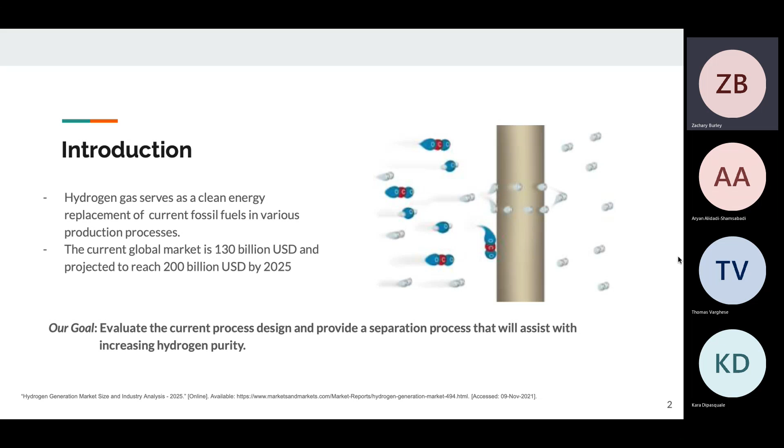We have been provided the task of evaluating the current initial design and simulation for this conversion process and providing a separation process that will assist in enriching the hydrogen gas production purity within the given restrictions provided.

To begin, Alpha Corp Industries is a company that focuses mainly on extracting value from natural resources such as minerals and petroleum. The company is currently in its preliminary stages of designing a new $2 billion chemical plant in Texas. As displayed in the flow sheet is their design, with an overall goal of optimizing on the growing market for hydrogen gas. It can be seen that there are currently two outlet streams within the process.

One is at the bottom of the flash drum, containing 99% water being sent to wastewater treatment plants. Within the red dotted box in the upper product of the heat exchanger, it can be seen that the company has currently reached an output of 59% hydrogen gas.

However, Alpha Corp Industries has little experience in further designing a separation process to enrich the hydrogen gas to a minimum of 98% purity. This is where our team of junior engineers comes in handy. As a team, we have a valid separation solution that will be proposed to you today in detail, which will enrich this hydrogen gas. Furthermore, we have a solution that will ensure that the hydrogen gas gets pressurized so it can efficiently be transported via pipeline to nearby clients.

In general, our solution includes the addition of metallic membranes made from palladium-based alloys, and we are excited to present this to you today.

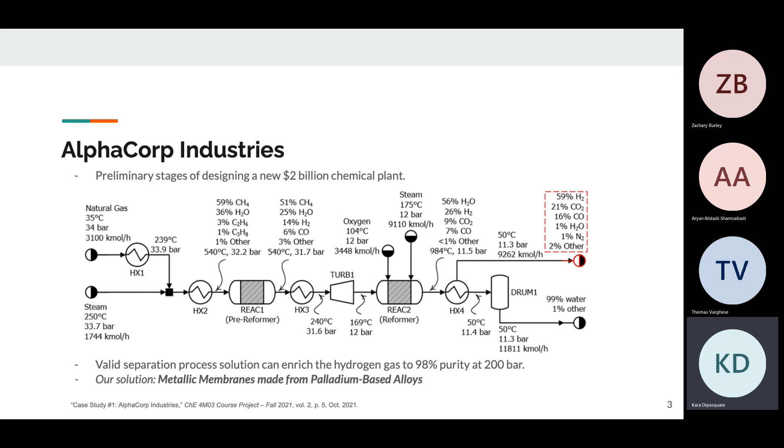Palladium is classified as a dense metallic membrane. Gas transport through the membrane occurs through a solution diffusion mechanism, where hydrogen dissociatively adsorbs and diffuses through the metal rather than moving through pores. Other than palladium, most metals require an energy input in order to overcome an activation barrier to adsorb hydrogen.

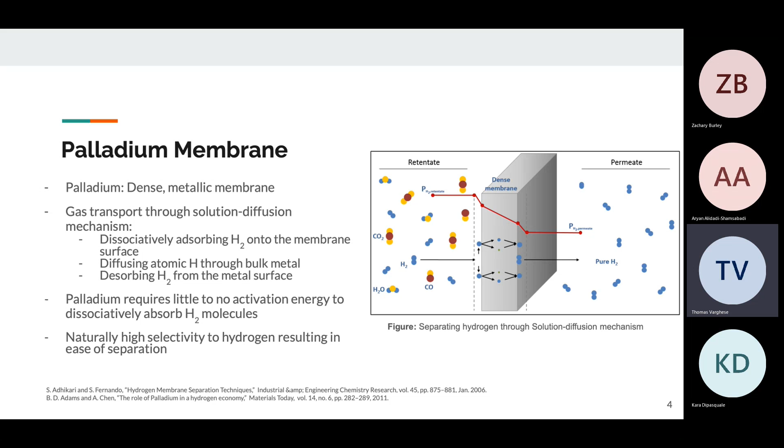This leads to higher pressures and temperatures being a necessity in the process. On palladium surfaces, the dissociative adsorption of hydrogen molecules occurs with little or no energy due to how naturally selective palladium is to hydrogen. This selectiveness also makes the separation of hydrogen much easier in the process.

Metals such as vanadium, niobium, and tantalum offer higher permeability when compared to palladium. However, when exposed to hydrogen at operating temperatures and pressures, these metals undergo a process known as hydrogen embrittlement, where they lose flexibility and become mechanically unstable. Additionally, these metals are prone to the creation of surface oxide layers, which lead to a decrease in hydrogen transport.

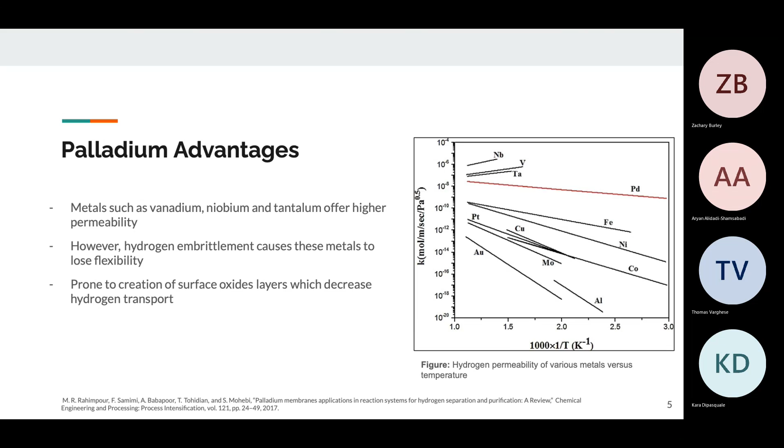Palladium is commonly alloyed with other materials for various benefits. Common materials used for alloying are silver, copper, and gold. Alloying with these metals results in increased permeability compared to pure palladium, better resistance to poisoning by different constituents in syngas like carbon monoxide and carbon dioxide, increased thermal stability at higher temperatures, and reduced cost of production, especially when using copper since it is a cheap metal.

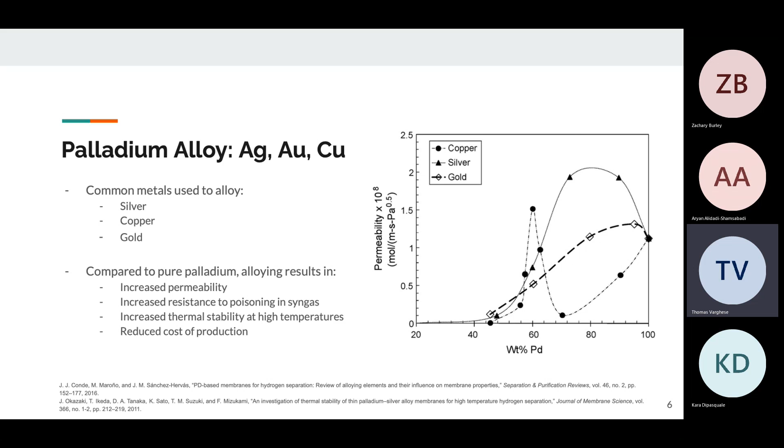As seen in the figure, the weight percentage used for alloying results in varying hydrogen permeability. To maximize permeance in palladium membranes, silver alloy weight percentage should be in the range of 10 to 30%, copper alloy weight percentage around 40%, and gold alloy weight percentage in the range of 5 to 20%.

Silver is one of the most commonly studied and utilized metals for alloying with palladium and can be found in existing commercial applications. Looking at the figure, we can see improvements in hydrogen permeability and flux with the addition of silver to the membrane. The addition of silver also increases hardness, mechanical stability, and chemical inertness.

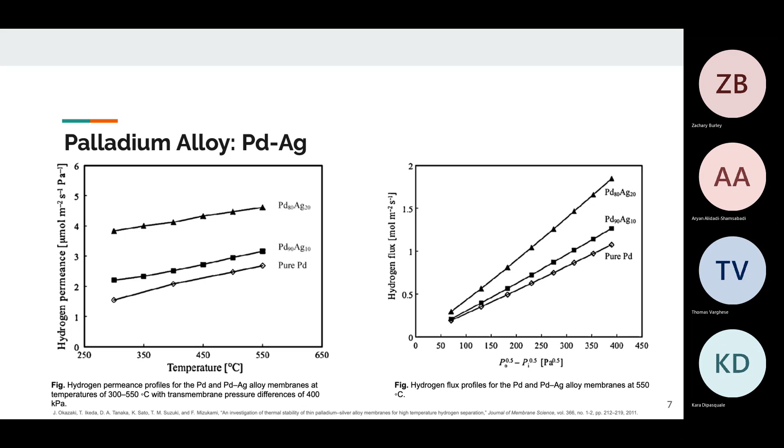The presence of additional gases in the feedstock can affect membrane performance and lifespan. These adverse gases poison palladium membranes, resulting in decreased flux and irreversible changes in some cases. Usually these gas molecules are adsorbed onto the surface and hinder the dissociation of hydrogen onto palladium, resulting in reduced mobility of hydrogen atoms located on the palladium surface.

Sulfur, carbon monoxide, and water vapor are common gases known to poison palladium membranes. Sulfur is more problematic as it leads to irreversible changes and eventual destruction of the membrane over time. In the case of Alpha Corp's feedstock, sulfur is not present and does not need to be accounted for, making the use of palladium membranes even more attractive.

Carbon monoxide and water vapor cause reversible changes on palladium, which lead to a decrease in permeability and flux. The product stream in Alpha Corp contains 16% carbon monoxide, which is a cause for concern.

However, alloying changes the surface reactivity and electronic structure of palladium and helps negate the poisoning effect of carbon monoxide. Additionally, operating at high temperature reduces it as well. Therefore, by alloying with silver and operating the process at around 550 degrees Celsius, we will mitigate the effects of carbon monoxide on the membrane.

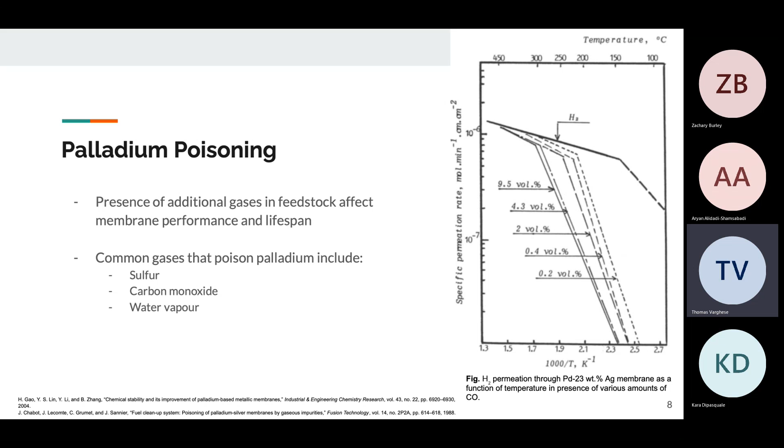Finally, water vapor only accounts for 1% of the product stream, which can be neglected once again due to alloying and the operating temperatures of our process.

It is without a doubt that palladium is the most widely used membrane material for hydrogen permeation and is infinitely selective to hydrogen while demonstrating a high recovery. For example, when compared with their counterparts such as polymer membranes, palladium-based membranes have the distinct ability to achieve hydrogen purities as high as 99% or higher.

This outcome, however, is only valid as long as process requirements and pre-treatment methods are handled appropriately. To reiterate, our goal as junior engineers is to achieve a minimum of 98% hydrogen from an initial composition of 59%. It is evident that this can be achieved in a single step with a palladium membrane, and the process must be carried out at relatively high temperatures.

It is crucial to note that palladium membranes are often damaged by hydrogen embrittlement, which could occur below the critical temperature of 293 degrees Celsius and a pressure of 20 bar. It's also important that we don't exceed temperatures around 650 degrees Celsius, as palladium may be subject to deactivation upon these extremely high temperature conditions.

With that being said, for our process we'll be making improvements to the membrane inlet conditions to ensure that the palladium membrane can result in an ultra-high recovered hydrogen stream. We will now be looking at our improvements being made to the design more in depth.

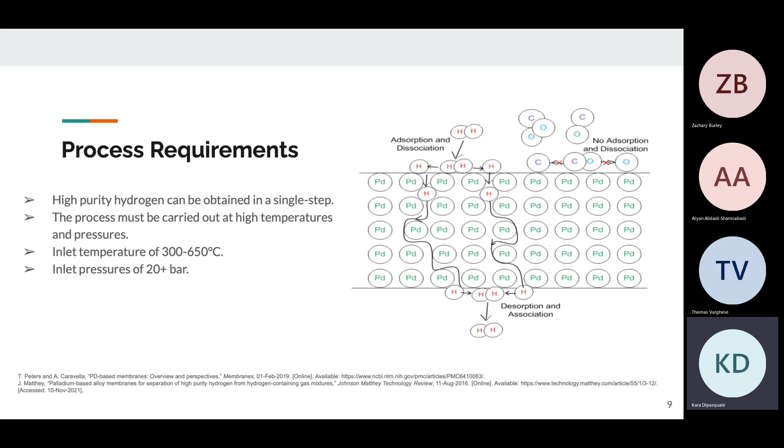As a team, we have made additional improvements to Alpha Corp's initial design. To begin, as stated earlier, we know that in order to achieve a high recovery, the membrane inlet temperature must be high, somewhere between approximately 300 and 650 degrees Celsius. We will be achieving this temperature by adding a series of heaters to the system prior to the membrane entrance.

These heaters will be placed after the heat exchanger in the process once water has been removed. We will also be adding a compressor to further increase the pressure of the mixture right before the membrane entrance. With valid high temperatures and pressures, our mixture is ready to enter the membrane. Once we achieve a permeate stream of hydrogen, we need to further compress the gas to achieve a pressure of 200 bar, allowing for the gas to be stored in pipelines.

The resulting hydrogen gas will also be cooled and stored at approximately room temperature conditions, being about 22 degrees Celsius. Our plan to improve the design will result in recovered hydrogen readily available for use.

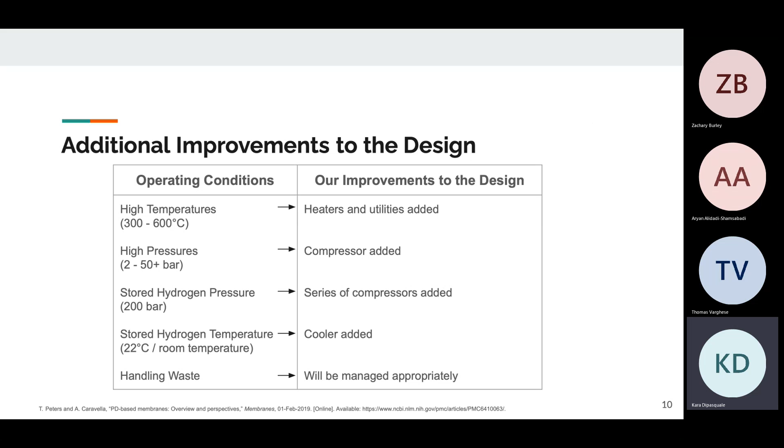However, we need to keep in mind that the membrane will also produce a stream of waste, which will be dealt with accordingly. The waste analysis will be discussed further on in our solution, but for now, let's visually take a look at our design improvements displayed in a piping and instrumentation diagram.

As displayed here, our generic P&ID shows all improvements made to the system, from inlet gases to pipeline storage and waste disposal. Within our process, you can see that we've made improvements to the upper outlet stream of the heat exchanger labeled HX4.

From here, we have added our series of heaters with a 2-bar pressure drop in both, followed by a compressor labeled Comp1. These improvements to the design allow for the desired inlet temperatures and pressures, being around 550 degrees Celsius and 20 bar respectively. The mixture of gases will now be able to enter the palladium membrane as the inlet conditions are valid.

The outlets of the membrane consist of a waste stream and a hydrogen stream. For the hydrogen stream, we'll be cooling the gas, again with a 2-bar pressure drop, then sending it through a series of compressors.

The 2 compressors in series ensure that the 1:5 pressure ratio is not exceeded. A final cooler is added after the series of compressors to store the recovered hydrogen at 22 degrees Celsius.

With this proposed P&ID, we'll be able to simulate our design in Aspen Plus.

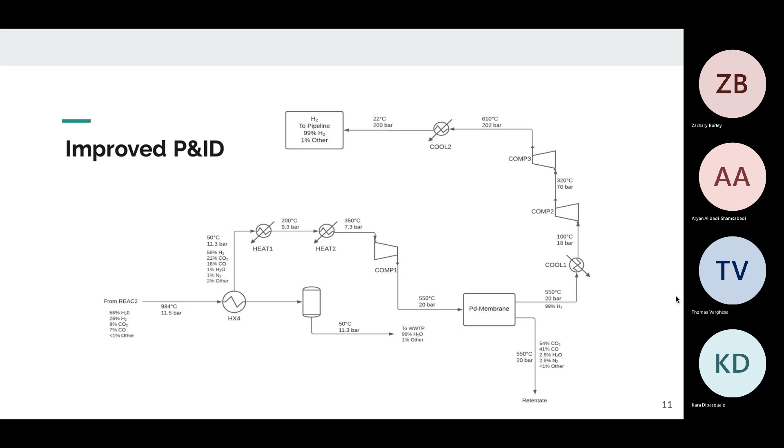We began the process from the heat exchanger outlet while disregarding the flash drum in the original design, as the water has already been purely separated and will be sent to the wastewater treatment plant.

The inlet conditions are displayed at 11.3 bar and 50 degrees Celsius with a molar flow rate of 9,262 kmol per hour. The inlet includes 59% hydrogen, 21% carbon dioxide, 16% carbon monoxide, and negligible amounts of nitrogen and water.

Prior to entering the membrane, we heated the streams with a series of heaters to 350 degrees Celsius while obeying the 2-bar pressure drop through each individual heater.

From here, we compressed the gases to increase the pressure to 20 bar. The compressor also increased the temperature of the gases to around 566 degrees Celsius, which is optimal for our membrane.

Our compressors are assumed to be isentropic, working with 80% efficiency. From here, our conditions were valid and the components were able to enter the PD membrane, or in Aspen terms, the SEP block.

The SEP block was used to eliminate all components that simply could not pass through the palladium membrane. Once pure hydrogen was obtained, we cooled the gas with the cooler and increased the pressure with a series of compressors.

A final cooler was needed to result in stored hydrogen at room temperature, and the compressors increased the temperature drastically. This resulted in nearly 100% hydrogen recovery, which is stored at room temperature, being 22 degrees Celsius, and the appropriate pressure of 200 bar.

The hydrogen is now ready to be stored in pipelines. All other waste exiting the membrane has conditions of 566 degrees Celsius and 20 bar. Now let's take a closer look at the outlet results achieved from our simulation.

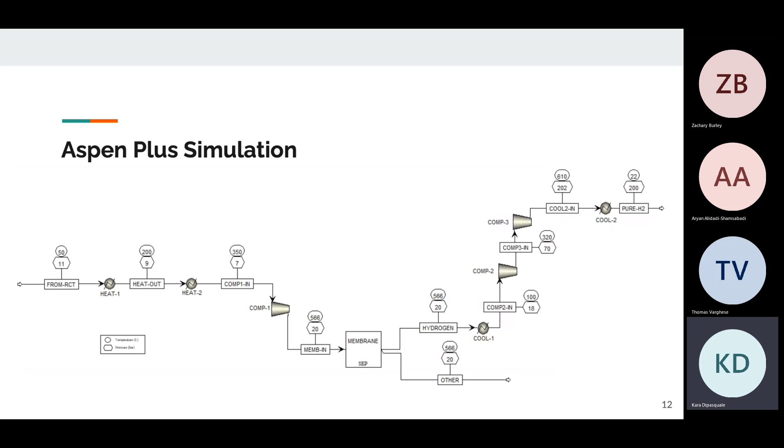The following displays the results achieved from the Aspen Plus simulation with the SEP block being used as the PD membrane. There are 2 streams obtained from the PD membrane. From here, we can visualize the molar fractions as well as the mass and molar flow rates.

First of all, from the stream labeled pure H2, it can be concluded that hydrogen gas is being achieved and is ready to be stored at the desired pressure of 200 bar.

From the stream labeled other, the components are displayed as they are released from the membrane. These components include carbon dioxide at 54 molar percent, carbon monoxide at 41%, and water and nitrogen gas both at 2.5%. These components were simply unable to pass through the palladium membrane and act as waste components.

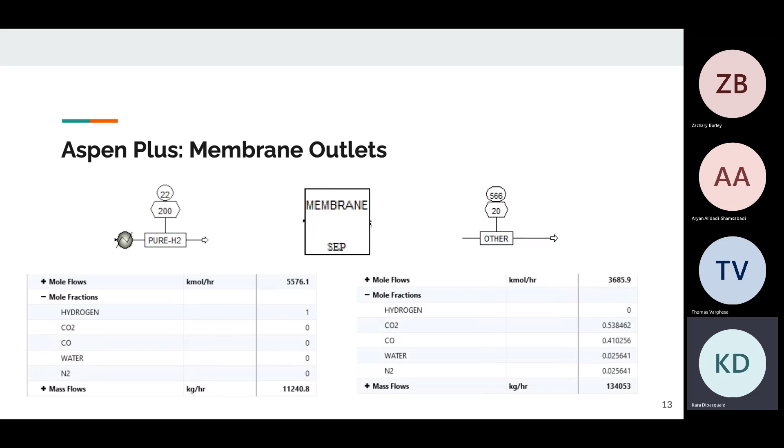A waste analysis will be computed to determine the best possible solution for dealing with the waste stream. There is a number of waste generated from this process, and a number of options are available for dealing with the waste generated.

The retentate stream is mostly comprised of carbon dioxide and carbon monoxide. This gas mixture should not be recycled back into the system, as there is not a considerable amount of hydrogen present in the stream.

The carbon stream can be sequestered via carbon capture and storage, CCS for short. There is a cost associated with this, but it is something to consider as carbon taxes are set to be 170 Canadian dollars per ton of CO2 generated by the year 2030.

The gas mixture could be flared also, or just vented into the atmosphere. This would result in emissions.

The palladium alloy membrane itself can be recycled. The palladium layer separated from the support can then be treated to solubilize the palladium and, where appropriate, the alloy metals to obtain salts that can be reused, for instance in the preparation of new palladium membranes.

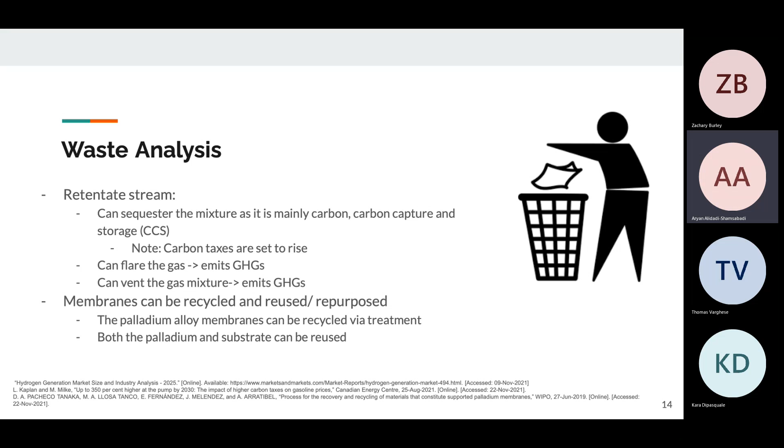The recovered supports can also be reused and repurposed.

The capital cost breakdown results in a capital cost range of $105 million to $169 million. The capital costs of the heat exchangers and compressors were accounted for since the streams need to be compressed and heated prior to membrane separation and then cooled significantly after membrane use.

Heat exchanger capital costs were computed using the area generated from Aspen, and then the Woods cost estimation for process industries. These costs have an uncertainty of plus or minus 20%. The compressor capital costs were also approximated using Woods and have a cost uncertainty of plus or minus 40%.

The cost of the membrane was found by utilizing the available flux for a palladium-silver alloy membrane, finding the area of the membrane using the flow, and then computing the cost on a square meter basis. There was no uncertainty available for this computed value, so it is assumed that the costs are accurate within plus or minus 50%.

The capital cost is presented as a range, since there are different costs associated with the retentate options. Carbon capture and storage would result in an additional $64 million in capital investment. Gas flaring would require a furnace, which would cost an additional $500,000 in capital, and venting would result in no capital investment. Both these costs have been assumed with an uncertainty of plus or minus 50%.

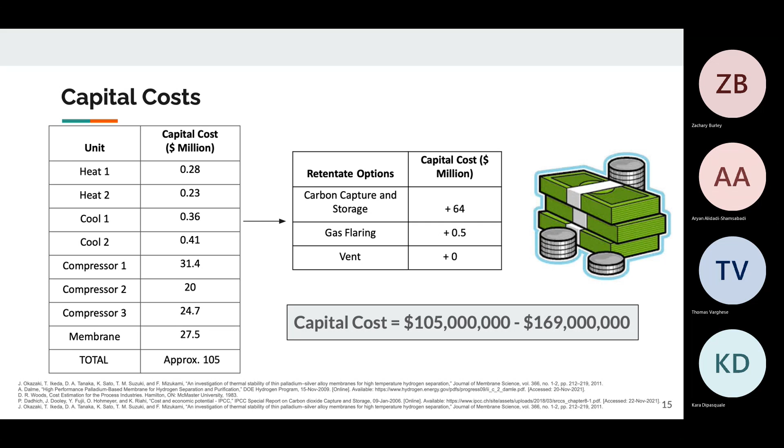Operating costs were computed by assuming that the process operates 8,000 hours a year. The operating costs include utilities required for heating and cooling. These utility costs were approximated using Aspen, as well as the utility costs for each type of heating and cooling.

Membrane costs were obtained by literature, and considering the lifespan of the membrane is around 5 years to get the operating costs. The cost of operating CCS was found utilizing literature as well. Using these values, the operating cost ranges from $31.38 to $35.98 million per year, depending on what the retentate option is.

The cost per ton of hydrogen then is approximately $532 to $708 per ton of hydrogen produced.

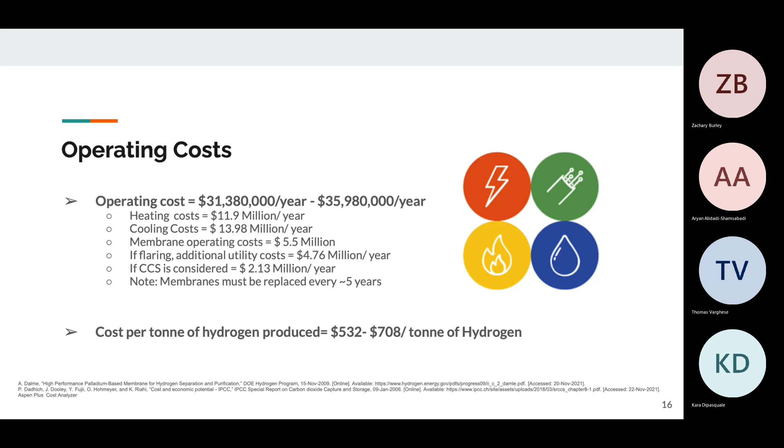Prices are expected to continue to rise as the supply is below the demand of the material. This has been the case for the last 8 years now. This is why alloying the membrane is considered, as it is cheaper, more attainable, and actually aids in increasing the flux of the membrane. Recycling of these membranes also makes the membrane more affordable. Currently, efforts are being made to make sure that they last longer, are more cost-effective, and more attainable.

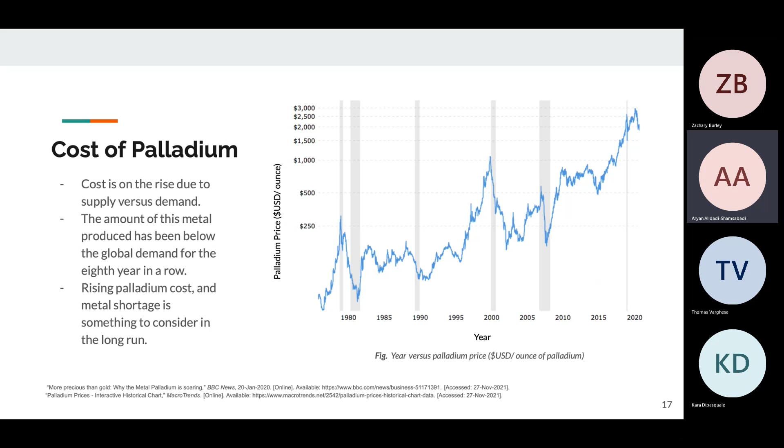Now that we've gone over some general aspects of palladium membranes and hydrogen purification, the pros and cons of the technology and a comparison will be done.

To summarize, some overall advantages of using palladium, specifically palladium alloy membranes, for the Alpha Corp scenario include: these membranes are distinguished in terms of hydrogen separation and purification due to their high permeability and selectivity for hydrogen, as they can attain high hydrogen gas recovery and purity up to 99% given the inlet conditions. This can be achieved using a single pass membrane in order to attain this requirement.

The overall process is rather simple, given the minimal maintenance and pretreatment needed. In addition, this membrane separation technique has relatively low energy usage, resulting in it being environmentally friendly and cost-effective during operations, especially when compared to other hydrogen separation techniques, which will be discussed further on.

Lastly, these membranes can be recycled and reused or repurposed for new membranes or other materials, contributing to the environmental aspects of the process.

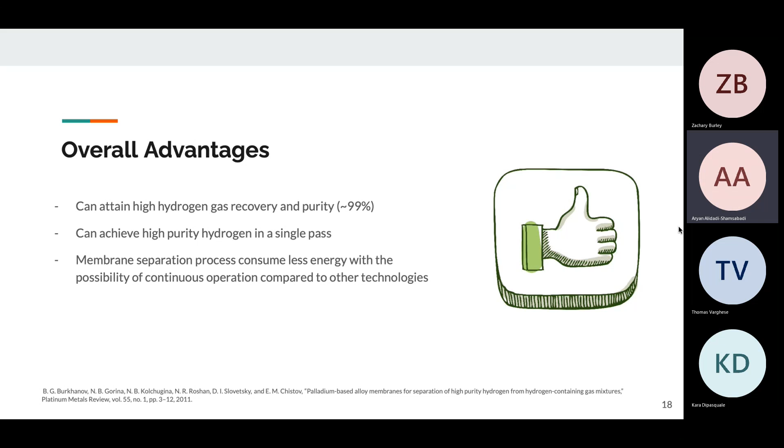Palladium-based membranes have some deficiencies as well. Firstly, when used for the application of hydrogen separation specifically, the membrane's exposure to carbon monoxide causes the permeation of hydrogen to decrease with continued use.

This problem can be resolved, but only by increasing the overall operating temperature of the system. The minimum recommended temperature for the separation of hydrogen is around 300 degrees Celsius. And as can be seen from the P&ID, we implemented an operating temperature of around 550 degrees Celsius.

This increased temperature is used to combat another main deficiency, which is to avoid embrittlement and cracking. When used in this application, having the membrane operate at a temperature below 300 degrees Celsius will increase this risk and will result in the lifespan of the membrane, which can normally last for a period of 5 years or more, to be reduced.

The increase in temperature to alleviate these potential shortcomings does, however, come at a cost. With the operating temperature increased to around 550 degrees Celsius in our system, the increased cost of utilities to maintain this increased temperature will increase as well.

Due to the previously stated issue of permeation when used in this application, palladium membranes require a relatively large surface area and must be ultra thin, approximately 1 to 10 micrometers, to be effective and maximize the overall flux.

In addition, the minimum operating pressure recommended for the separation of hydrogen is around 2 megapascals. This level of pressure is also required to maintain the necessary flow and flux through the membrane. Due to palladium being a metallic membrane, the amount of pressure required to increase the flux is more than would be required of a microporous membrane, as the relation of pressure to flux, when compared, is not 1-to-1. This increased pressure will come at an increased cost to the utilities.

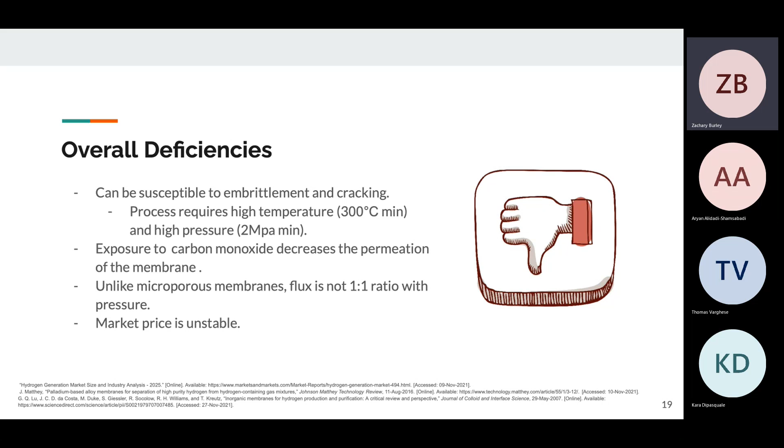In terms of overall cost, when compared to the two alternative presented methods of pressure swing absorption and cryogenic distillation, although palladium-based membranes provide a more economical solution, the market price of palladium is high and has been continuously increasing. Looking at the current trend and its likeliness to continue, the long-term effects of increased palladium prices should be considered as a potential deficiency moving forward. These advantages and deficiencies of palladium membranes were considered when looking at the process requirements.

Here, we are comparing the palladium-based membrane to other models, including pressure swing absorption, or PSA, and cryogenic distillation. In comparison to the palladium membrane, PSAs are capable of producing ultra-high purity hydrogen up to 99% while operating at high or low pressures. With that being said, however, they require complex control schemes and have a much higher operational and capital cost. PSA control involves precise depressurization and repressurization steps between beds, and bed cycle time must be closely controlled to prevent oversaturation of the bed.

Which can result in off-spec hydrogen. As well, temperature is a critical factor, as high temperatures reduce the absorption capacity and increase the capital cost, so temperature must be closely maintained. PSAs tend to have a lower turndown capability than membrane units.

Next, cryogenic distillation is much more capital and energy intensive than membrane separation and PSA, as well as operationally challenging. For these reasons, cryogenic distillation used for hydrogen purity is far less common. However, it is highly effective for streams that contain methane.

To conclude the comparison, it is evident that palladium membranes are most feasible when it comes to capital costs, as well as maintenance and pre-treatment methods. When comparing startup times, palladium membranes typically have the shortest time, and they ensure a high hydrogen recovery as long as inlet conditions are met.

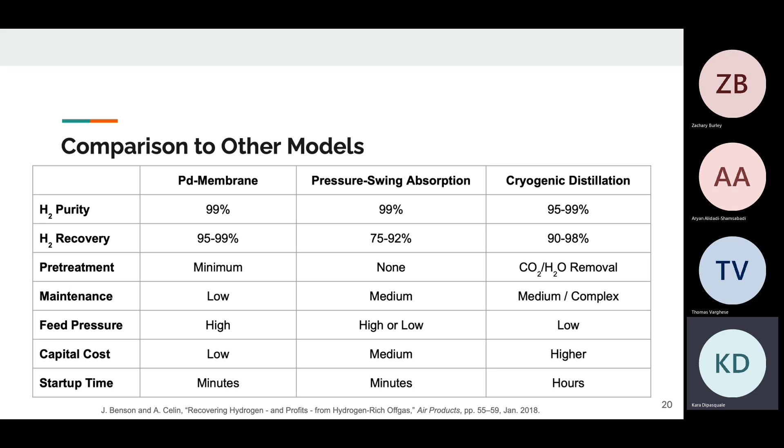Overall, there is a high comparison between all three technologies, and they all have proven to be successful with separation processes. But what does the future in regard to research look like for these membranes?

Up to date, palladium is the most studied metal for preparing hydrogen-selective membranes. Over the years, palladium membranes have been investigated in numerous applications where hydrogen gas is involved and have been an extremely popular method of separation.

As we have previously reviewed the deficiencies, such as embrittlement and cracking, it is also important to note that various researchers in the field are tackling these problems. Main efforts are focused on reducing the cost of these membranes and increasing their membrane resistance and lifespan.

Palladium is expensive and has a growing demand, and its price is expected to keep driving up. In the future, strategies will continue to be studied to reduce the cost of the membrane by minimizing the amount of palladium required and increasing the lifespan of the membranes.

As research for improvement continues, hydrogen is prospected as a sustainable energy carrier for the future of various applications, and is without a doubt a growing industry as palladium membranes are being actively used and researched globally.

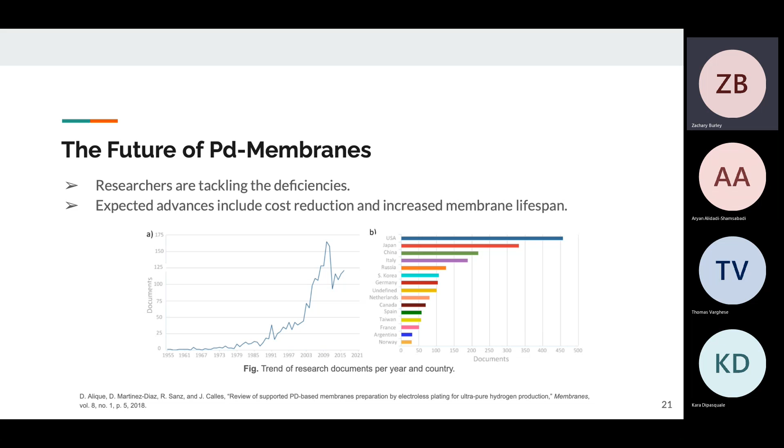The separation of high purity hydrogen from the hydrogen-containing gas mixture using palladium-based alloy membranes is an effective process for the commercial production of high purity hydrogen. Our proposed solution using palladium-based membranes provides Alpha Corp with a method that yields high product recovery in a way that will be cost-effective and environmentally sustainable going forward.